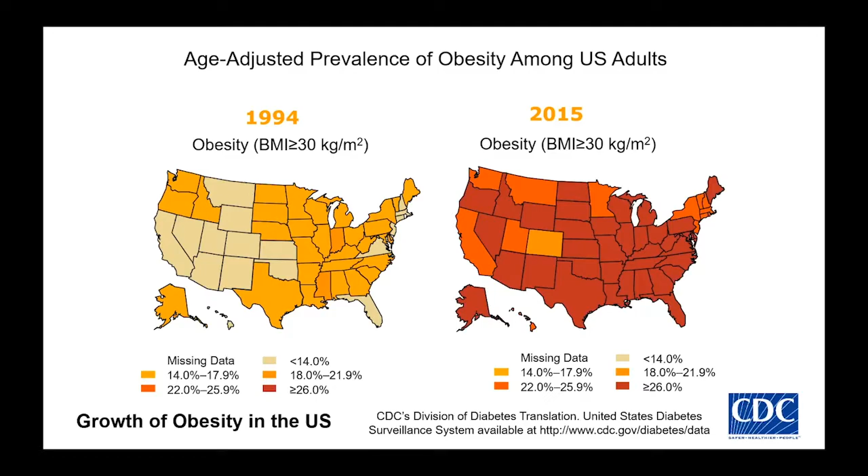So really, we think it's very important what we do as landscape architects, to create places for people to connect with nature and to exercise and to play. And that's why we think it's very important what we're going to be showing you today.

Quick history of Mission Valley. As you probably know, the San Diego River runs right through Mission Valley. It's 52 miles long, a 440 square mile watershed, a significant body of water. The Kumeyaay Native Americans inhabited the valley for over 10,000 years. We built the first Spanish mission in Mission Valley in 1769. And then in 1816, a significant change was the Mission Valley Dam and Flume, built to carry water into the valley. And then the water supported agriculture and dairy farms, all the way up until the 1960s.

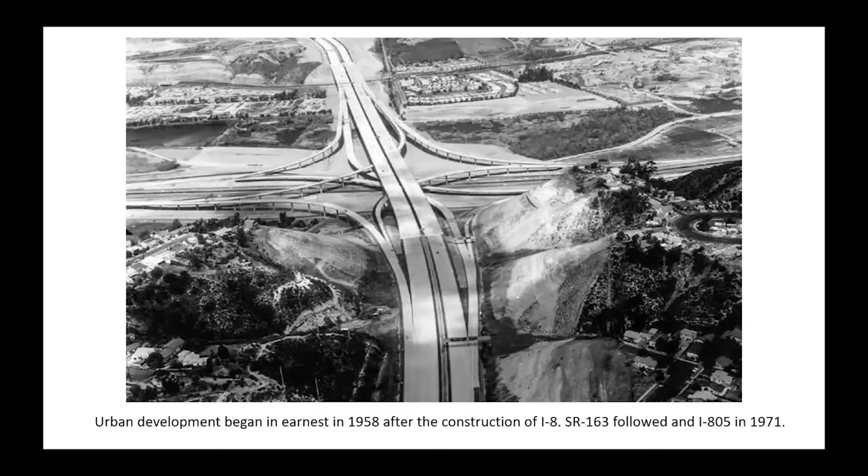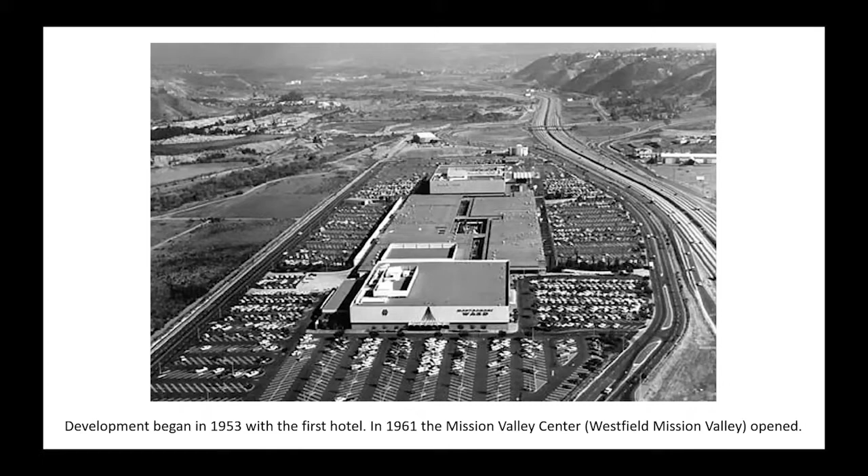And then in the late 50s, early 60s, we had the 163 and 805 built. We had the first hotel built in 1953, Mission Valley Center in 1961, and development continued throughout Mission Valley. Now, of course, that was offset by a number of flood events.

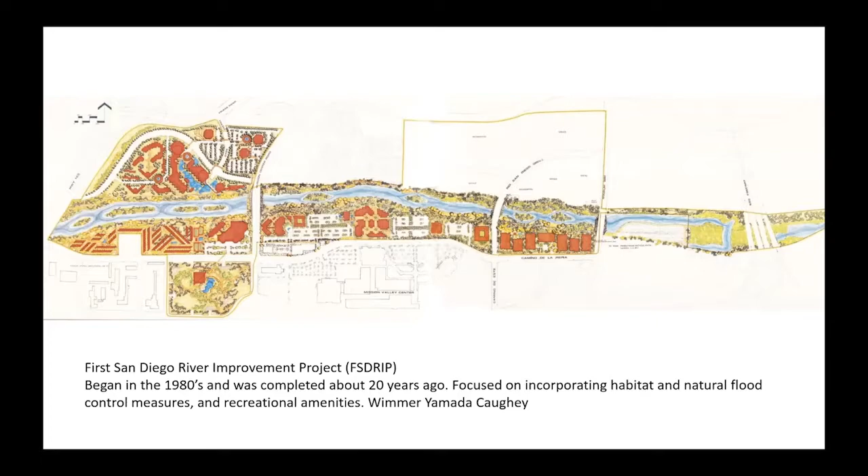And so the first San Diego River Improvement Project began in the early 80s and completed about 20 years ago. That focused on incorporating habitat and natural flood control measures and recreational amenities, which really has helped to create a much healthier river and to offset many of these flood events.

And then we have the River Park Master Plan, which actually envisions a linear park all the way along the San Diego River from the ocean all the way to the mountains. That is being implemented piece by piece, and our projects are part of that.

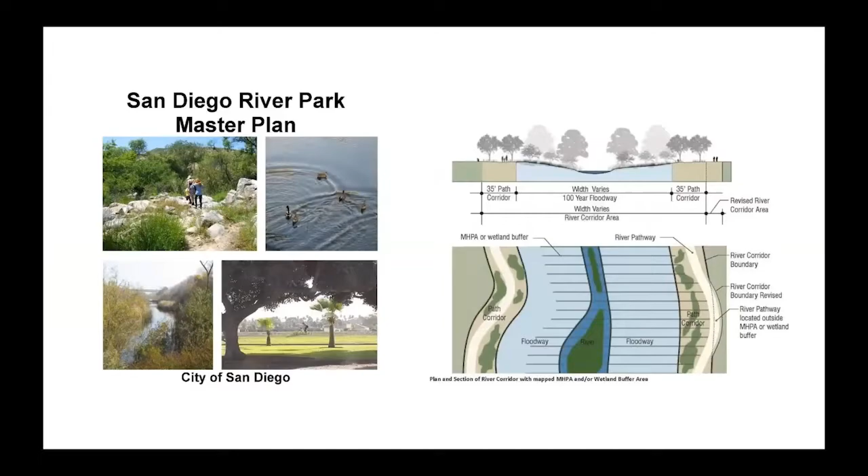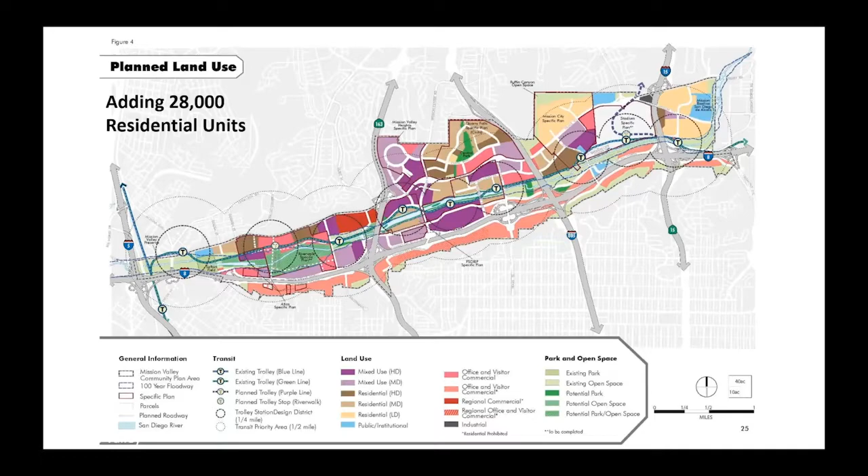Then the Mission Valley Community Plan was adopted very recently, September 2019, and that has envisioned adding 28,000 more residential units to Mission Valley. So significant changes along with a number of parks and open spaces. And our 5 projects represent about half of that added density. And we're going to give you a tour of each of them, starting with Mark, who's going to talk about Riverwalk.

Great, thank you, Glenn. I appreciate that. So yeah, Riverwalk is a transit-oriented development project that is proposed by Hines. It's currently in the planning entitlement process, and it's located along Friars Road, just west of Fashion Valley Mall. It's currently a 27-hole golf course, which is a lot of open space, but it's primarily great for those who golf and limits access to the site for those who don't. So what's great about this project is it will open up a lot of open space to the general public.

The project itself is proposing 4,300 residential units, primarily north of the river, 1 million square feet of Class A office space, primarily focused in the southeast corner of the site, a retail hub centered around a new transit center trolley station along the Green Line, and 97 acres of park space and open space that we'll focus on today.

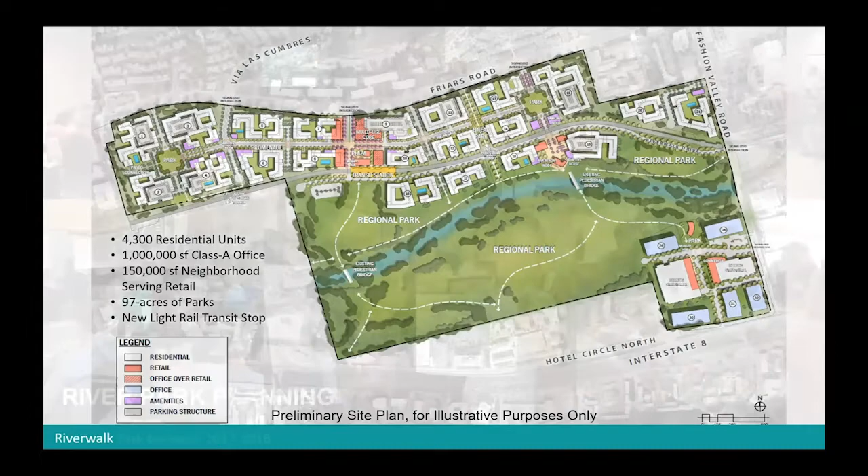Throughout the last 4 or 5 years of the planning process, Hines and the design team have made multiple public workshop presentations and multiple presentations to both Mission Valley Planning Group and Linda Vista Planning Group as well. As a result of the public outreach and some of our work with the community focusing on the park design, the consensus has been that the public is looking for about 30% of the park spaces to be used for active use and 70% used for passive.

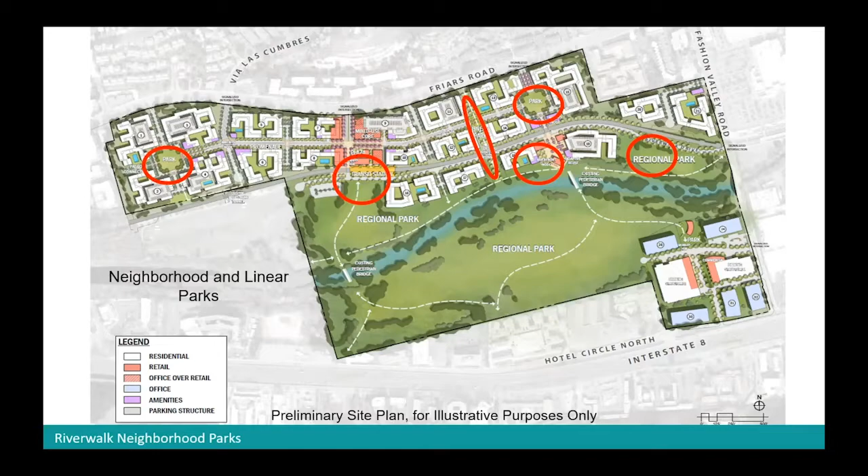The overall development includes a variety of different shapes and sizes of park space and open space, includes 2 mini parks and multiple pocket parks north of the existing tracks, a linear park that would connect Friars Road to the San Diego River corridor and the river park, public plaza space centered around the proposed transit center, and 2 neighborhood parks just north of the proposed river park.

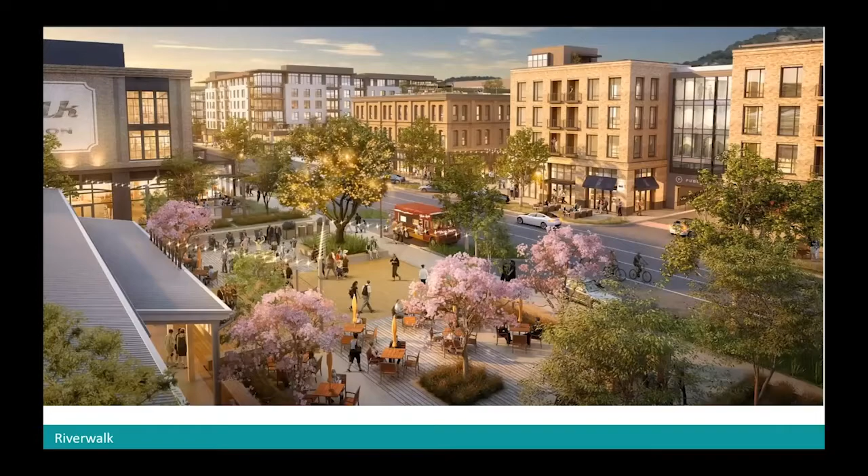This is the north side of the Trolley Station, a public civic plaza space that would provide uses such as outdoor markets, outdoor dining, food trucks, and civic gatherings. The next slide is of the south side of the Trolley Station, which you can see incorporates some retail and would help activate the space.

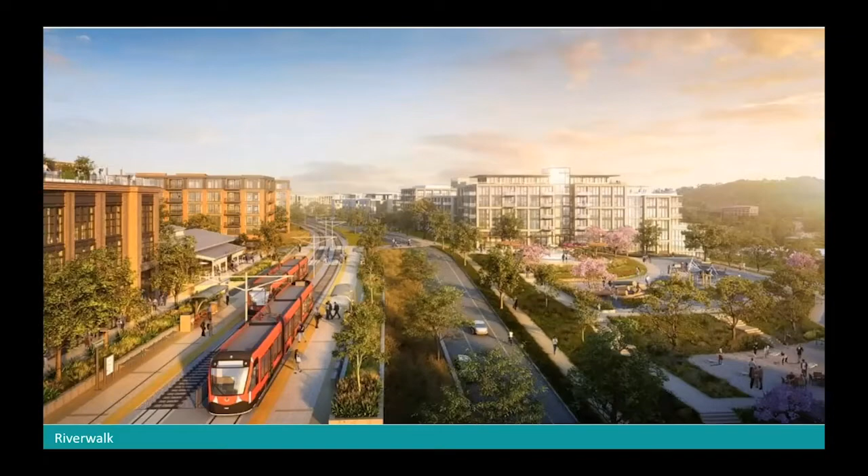This view shows the proposed Trolley Station on the left and a neighborhood park to the right. And with the topography of the site, the Trolley Station sits up such that it really gives great views south to this expanded open space and river park. Many of the streets will also help reinforce that connection to the river and open space, especially the north-south streets, as they are view corridors to that open space.

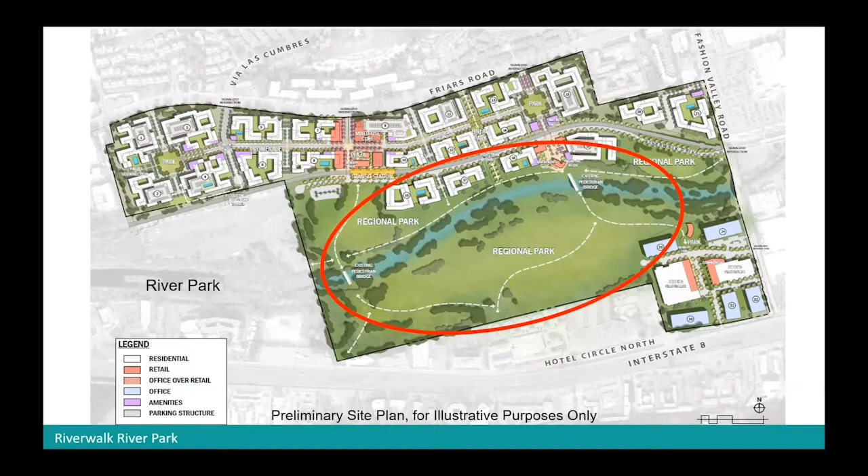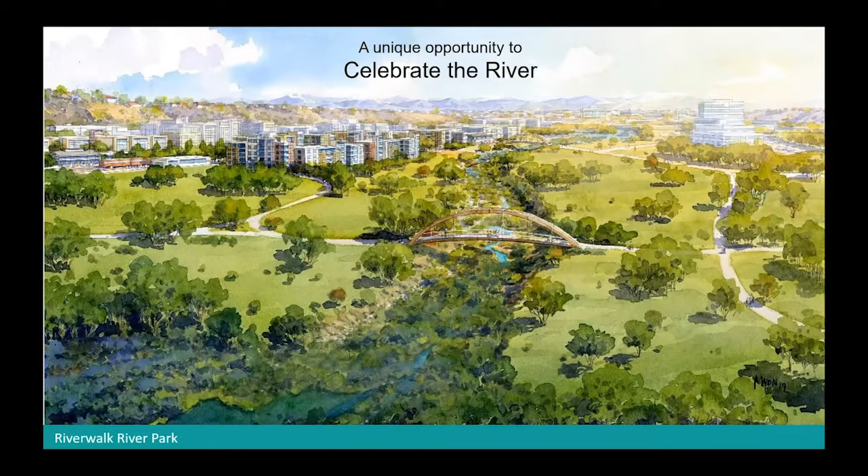So the regional park obviously is the focus of today's presentation. It's approximately 80 acres of park and habitat/open space, creation of a lot more habitat as well with this development. It will add about 0.75 miles of San Diego River Trail and habitat creation on both sides of the river, and miles of trails throughout. And so what we see here is an opportunity to connect with the river, celebrate the river, not just in the river park, but even throughout the entire development.

And what this does too is it also removes a lot of non-native turf grasses and reduces the fertilizer needed to maintain a golf course. So we're really improving the health and ecology of this section of the river.

Throughout, we'll be adding a number of observation areas and interpretive signage for educational opportunities, so that people can learn more about the San Diego River and the flora and fauna that exists throughout. As I mentioned, San Diego River Trail will connect through and add a missing link, a big missing link here, and we'll also connect to the portion through the Town and Country project that Rick will be presenting next.

Throughout the river park, we envision a number of amenities, such as connection to nature and water, interpretive signage, outdoor fitness, which ties into what Glenn was talking about earlier, as well as these open turf areas, which is a significant need for Mission Valley right now. There's a deficit, and these projects that we'll present will help fill in that need.

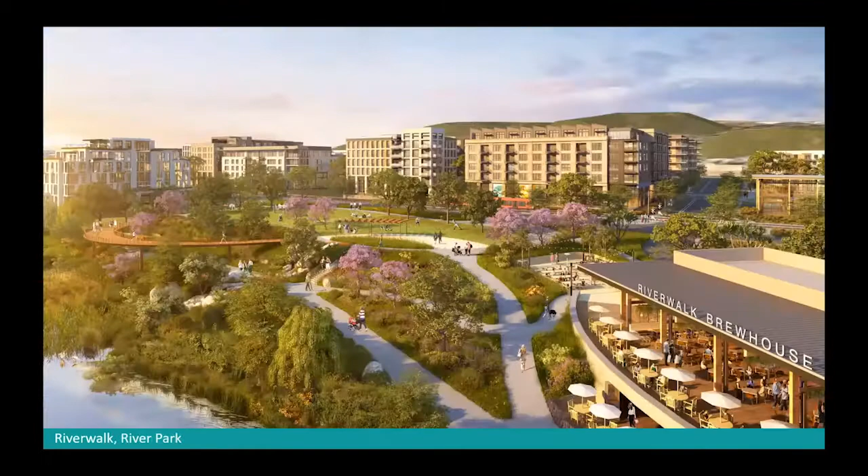One of the unique things about this project is Hines is proposing to take the existing clubhouse and redevelop it and repurpose it as a restaurant or brewery, as you see here. And adjacent to that would be one of the neighborhood parks where we hope to include an observation deck that would really help create that connection and view of the river, which is few and far between right now. Next slide, same thing.

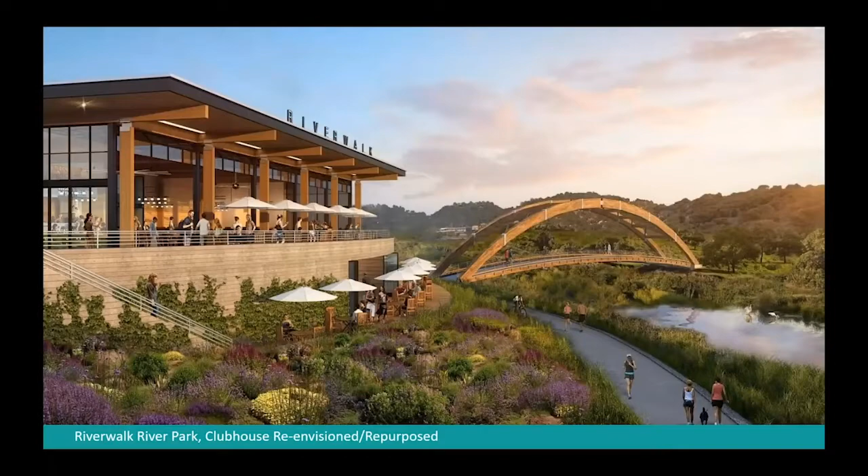One of the other unique things about this is utilizing the existing bridges. There's two of these very architecturally striking bridges that would be utilized for connection north and south.

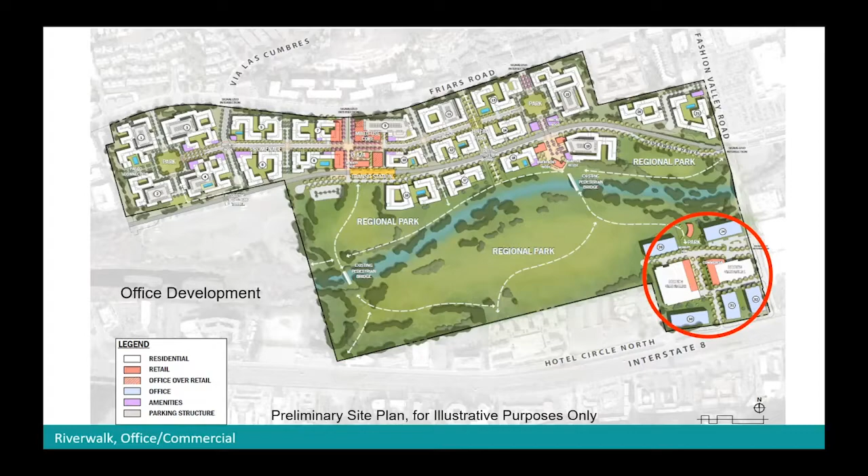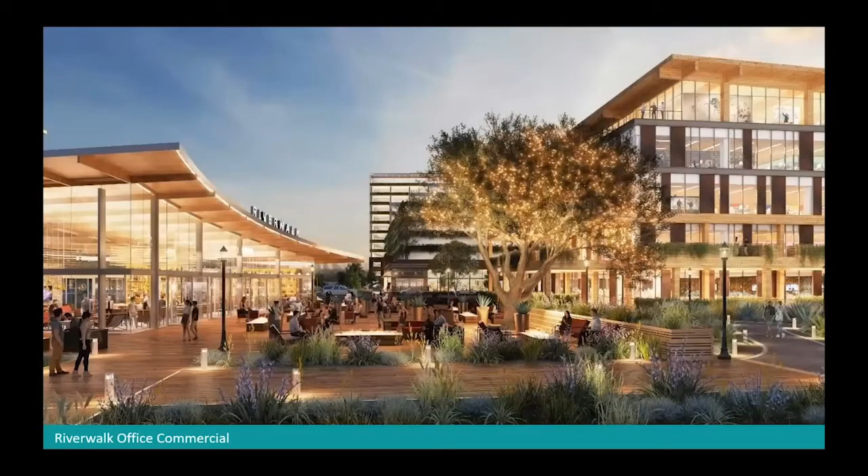Lastly, I want to quickly focus on the office development. It too, like the residential portion, is focused on creating a connection to the open space. And a couple renderings here highlight that. It opens up to the trails that you can see on the right, and we hope to create throughout the whole development a couple tributaries, as we call them, which are sort of faux connections that lead down to the San Diego River and River Corridor. With that, I'll turn it over to Rick, who will present Town and Country.

Great. Well, thank you, Mark. Just immediately east of the Riverwalk project is the Town and Country project. The Town and Country Resort has been a hallmark icon in the heart of Mission Valley for over 50 years. And just a couple of years ago, Lowe Enterprises, the developer of this project, began a complete top-down transformation of the hotel with new residential buildings, significant pedestrian improvements within the project, new resort pools and other amenities for guests.

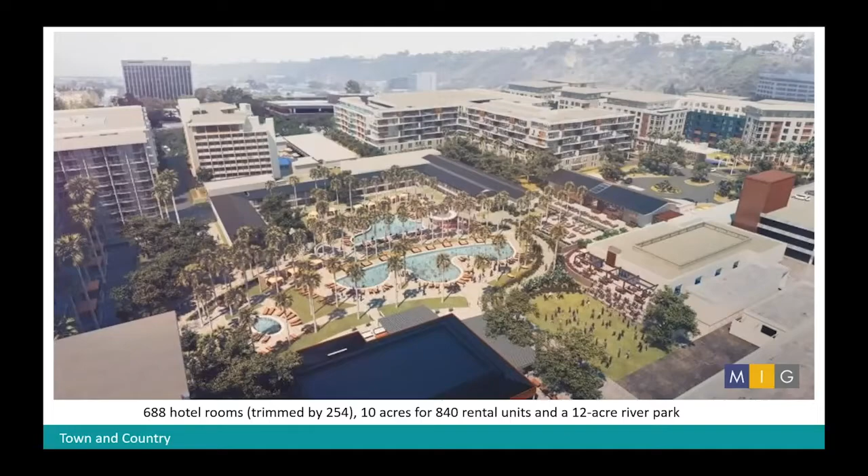So over the course of the design of the project, we worked closely with Lowe Enterprises and Todd Major, Rob Hutsel, the River Park Foundation and others to transform these parking lots into parks. This includes a number of trails, a new pedestrian connection across the San Diego River, and overall a very strong emphasis on ecological improvement of the whole 12-acre area.

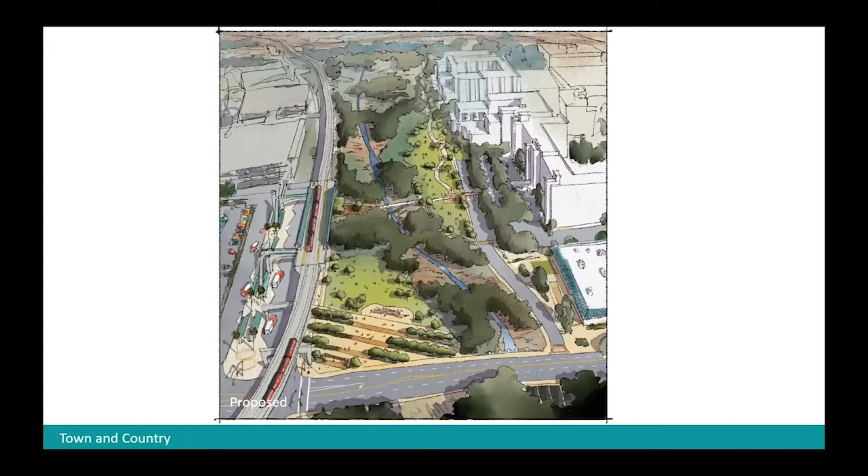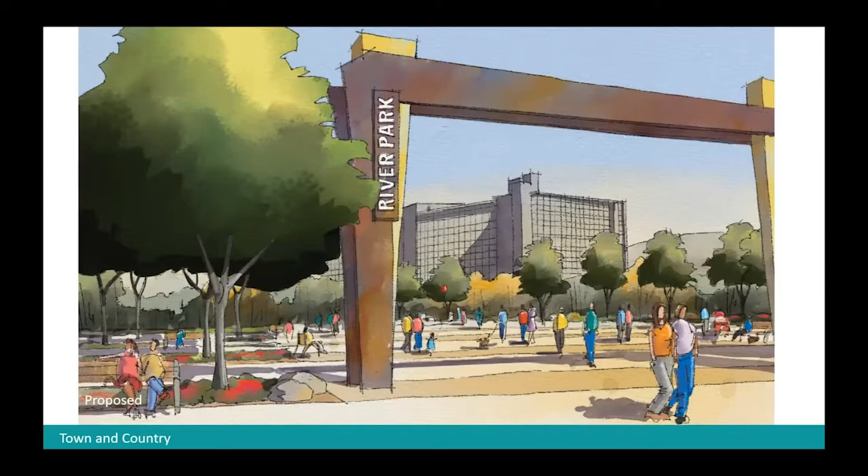As depicted in this next slide, the surface parking lots are being transformed into park space, including, again, a major component of the San Diego River Trail, which Glenn mentioned, which will eventually connect the ocean to the west to the upper elevations and the mountains to the east. So that's part of the River Park Master Plan, and will include significant gateway and interpretive elements that speak to the history of the river in this area.

And again, this is a project that is very much focused on the San Diego River and will provide a valuable asset, not just for hotel guests, but for residents of Mission Valley as part of that 28,000 unit growth. And as depicted here, a new pedestrian bridge across the San Diego River was a big part of the project. The previous bridge was not ADA compliant, and as Glenn mentioned, this project is under construction and in fact will be nearing completion in the next month or two. And I encourage you all to come down and visit the Town and Country River Park between Town and Country and Fashion Valley Mall.

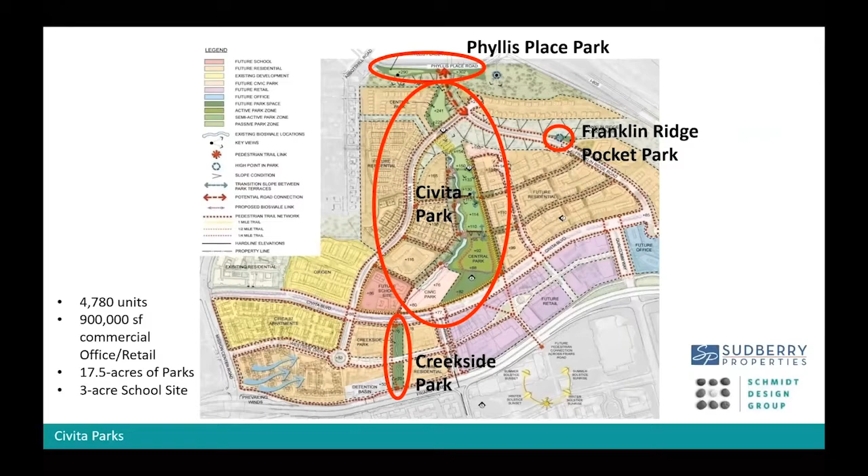Great, thank you, Rick. I'm going to be talking a little bit about Civita. Civita is located north of Friars and in between 163 and 805. As many of you recall, this was a sand and gravel mine for about 70 years and has transformed into an urban walkable village. There are a number of parks throughout this development, which eventually could have close to 4,800 units, 900,000 square feet of commercial office. But our park spaces, close to 18 acres of park spaces, are really going to be interesting spaces. We have a number of pocket parks and things around the development, but I want to talk about the main portion of the park, which we call Civita Park. It really runs down the center of the development.

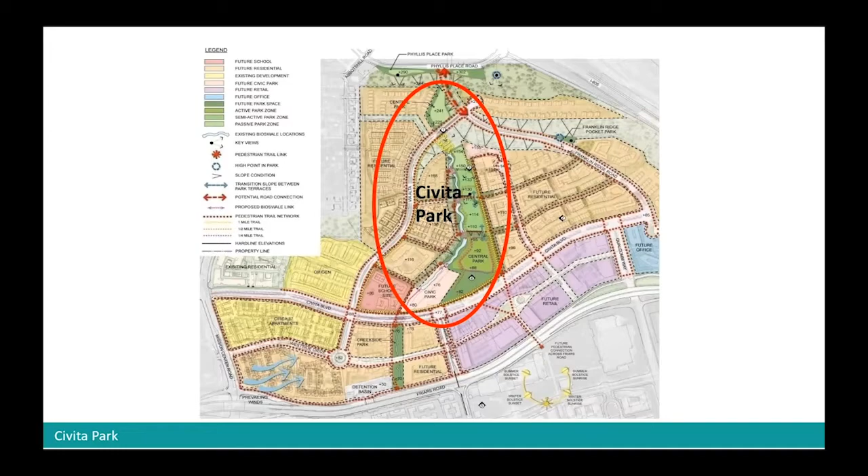But first I want to recognize the Grant family who have owned the land for centuries, and their partners, the Sudberry family and Sudberry Properties, who are developing it. They have just been very special clients and have really wanted to create a family legacy that they leave for all of San Diego. And so real proud of being able to work with them and the commitment they've made to quality. Of course, besides working with the families, we worked a lot with the community and had a number of community workshops, got a lot of feedback, but also were inspired by Mission Valley itself and the site.

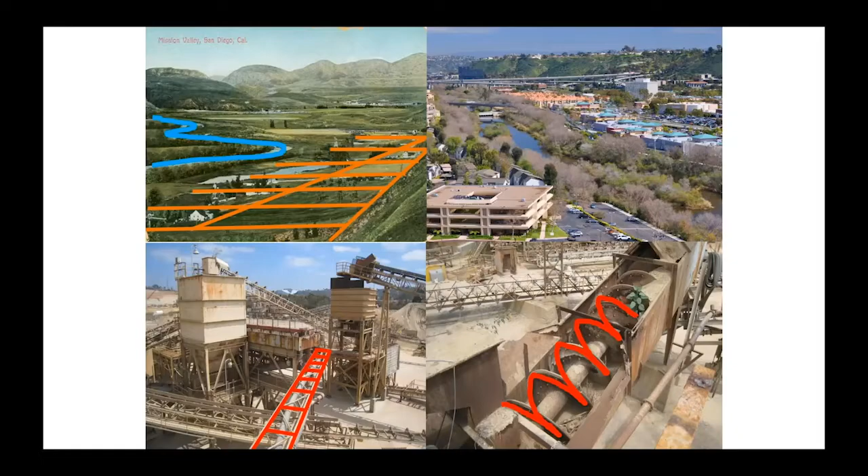So the upper two slides show the valley, even when it was agricultural, was a series of parcels and then this meandering river, same as the urban condition, and then some of the shapes within the sand and mining equipment inspired some of the forms in our park, which is that red promenade and the river that we put along the west side of the park. This is what we call Civita Creek, which captures all the water quality throughout.

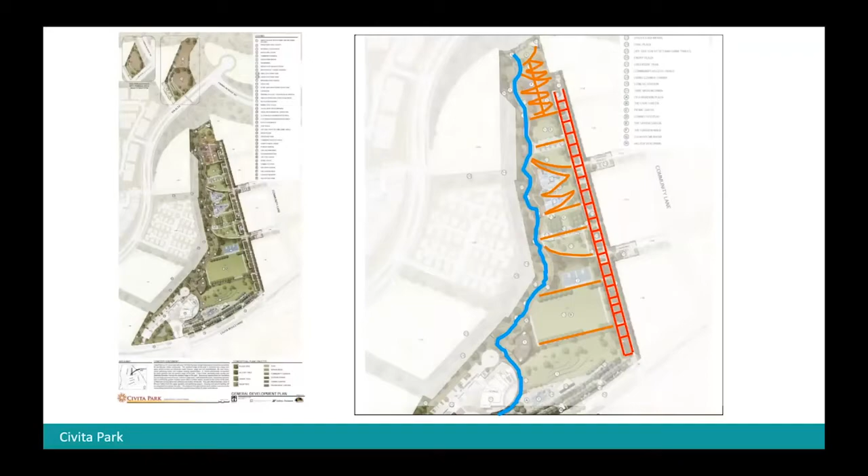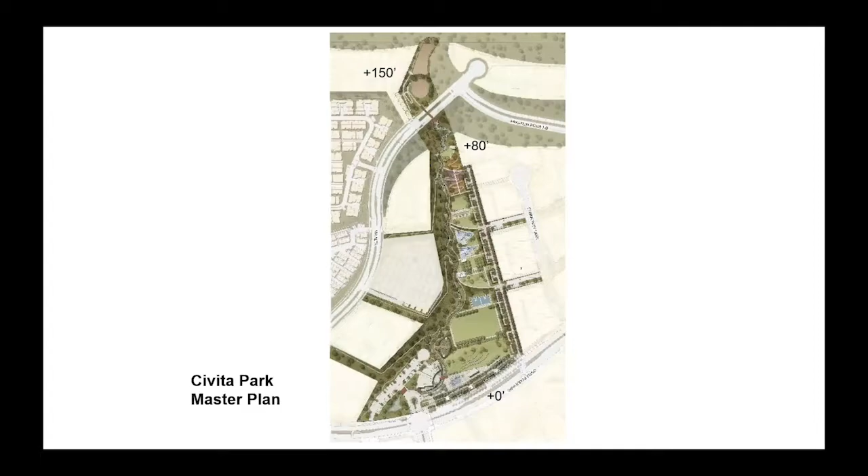So there are kind of two sections of the park. The right side of the park, which is the East Park, is more of this formal promenade along the urban edge. And then along the western edge, it's more natural. It's this meandering creek bed with these drop structures that actually flow during rain events. And that creates a really interesting, diverse character of the park. The master plan itself actually rises about 150 feet from Civita Boulevard to the top. Our first phase was completed in 2017, which includes a number of amenities.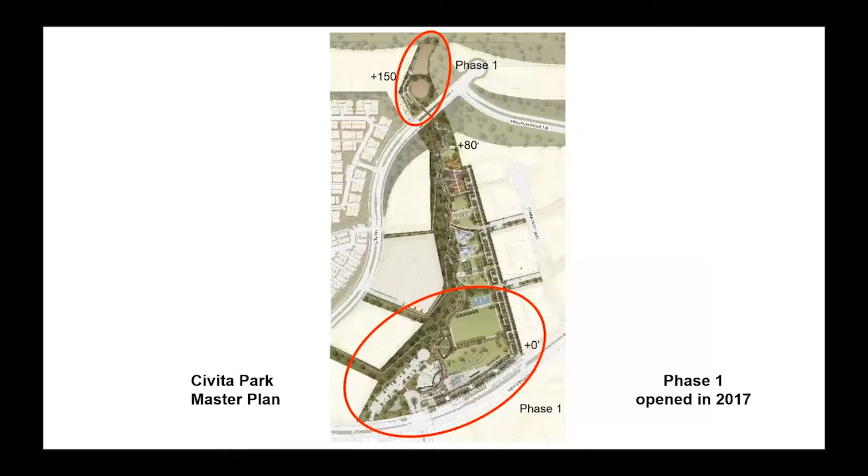We have a large celebration plaza, we call it, with open space and this interactive water and game tables. We also have a very large amphitheater structure there. And this plaza space is used for celebrations. We have farmers markets and all sorts of events, including this amphitheater. We call it Cloud Amphitheater, inspired by clouds in the valley, where they have a number of summer concerts each summer, which are free to the public.

We also had a number of different interesting details kind of weaved in throughout. We worked with James Nelson and T.J. Dixon on telling this interesting story about the history of the families here that were part of the development, the Grant family. And we have these series of bunnies, these bronze bunnies throughout, and they're almost kind of breadcrumbs.

They lead you up to what we call the Civita stone, which you have to search for with your kids when you get there. But even like these areas that we have, we call them the living rooms, which are these large vine structures. We have some of the bronze sculptures right there on the couch to sit with you. So really interesting things throughout.

We have a large area for multi-purpose activities, a large field. We have basketball. There's actually a community garden with a fully restored 1955 Porsche tractor that sits out front. And at night, that interactive water becomes a really beautiful display.

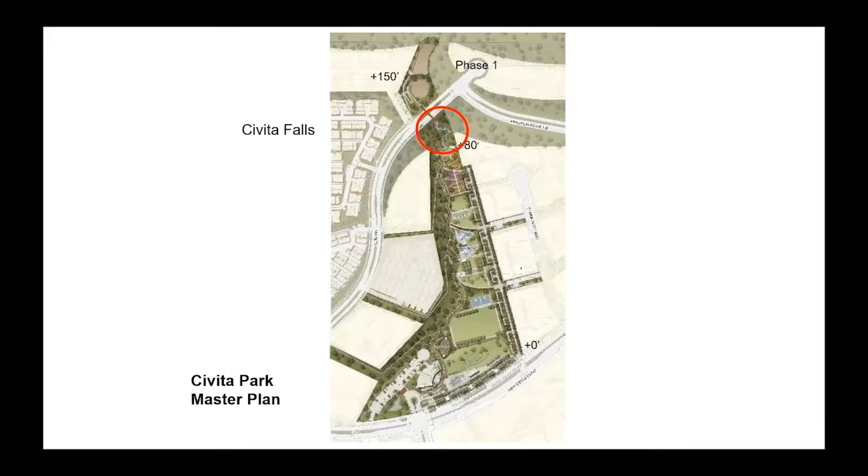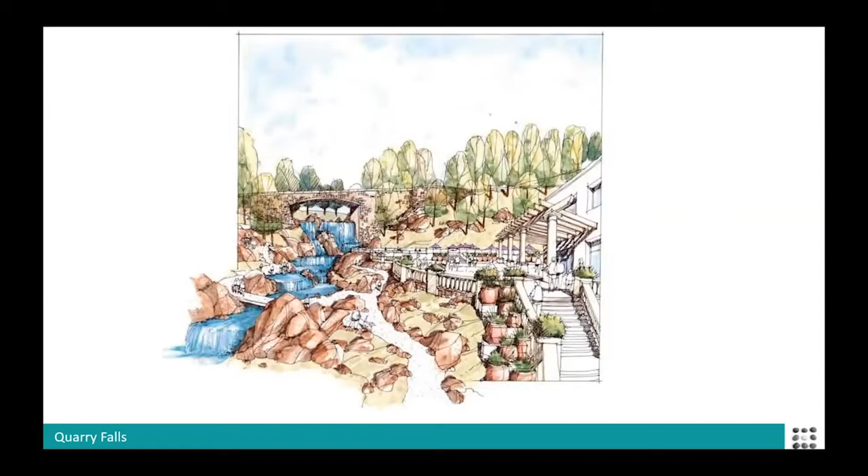One of the features that was originally designed in the specific plan, which actually Rick was involved in, was called Quarry Falls. And the idea was to have this kind of Las Vegas style waterfall. And what we did was we created the Civita Falls, but it is a natural waterfall that captures watershed from the surrounding communities. So during rain events, this waterfall flows, and it's quite fun to see it going off during storm events.

And as you see, there's a stairway that leads up to the upper level, which has a dog park, and you go through a really beautiful tunnel that has artwork, a really large mural created by Kevin Anderson. That's really fun to visit as well. And up above there, we have an off-leash dog park.

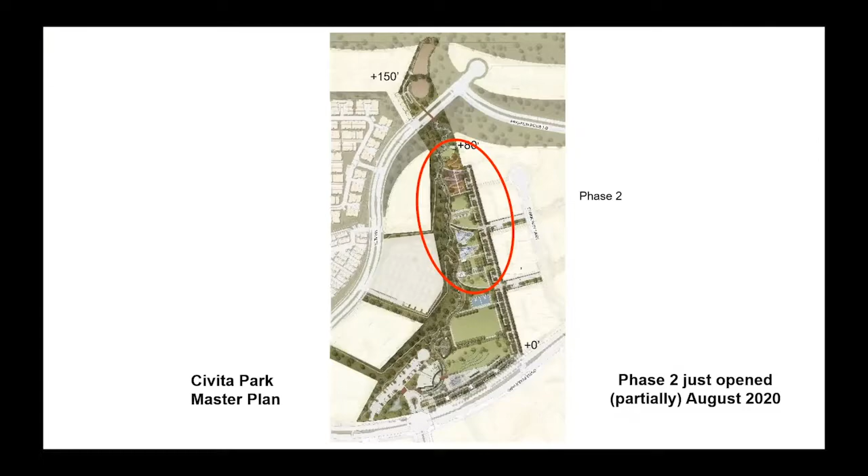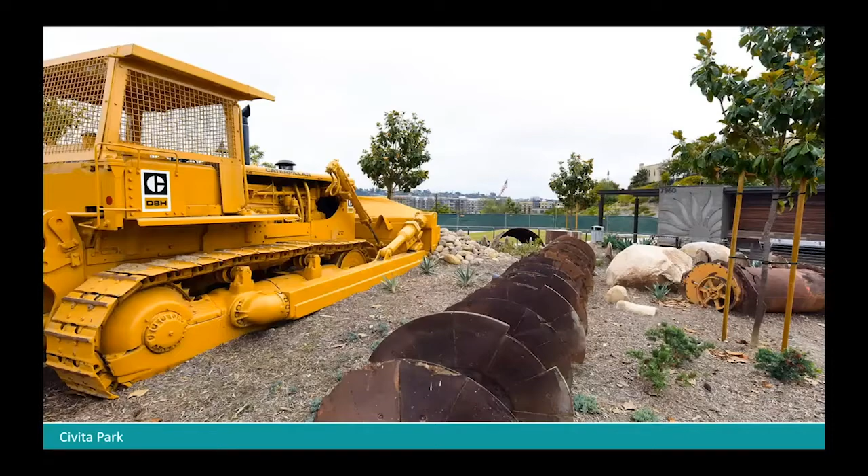Most recently, we just opened phase 2, which fills in different activities that were missing in phase 1. Phase 1 was opened in 2017. And here we have an overlook of phase 2. Starting down below, we actually have an exhibit that honors the mining history of the site with mining equipment that we tagged when they disassembled the mining operations, a large tractor.

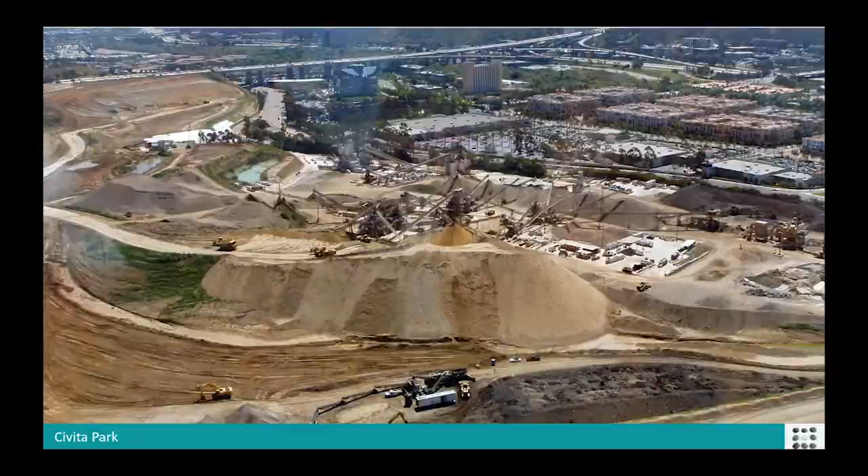And right above that is a number of children's play areas. This is a toddler area with a shade structure. We have some logs that were salvaged from redwood trees that were moved from Balboa Park. But this whole area of the playground especially is inspired by the forms of the mining operation, the way in which they terraced and sculpted the hillside. So the playground has over 100 feet of climbing walls as part of the terrace, paying homage to the mining operations that were there once before.

Right above that, we have a terrace with a game area with a bocce court, picnicking, and game tables. Above that, we have a series of gardens, which you can stroll through with the meandering pathways and stairway with all sorts of colors and textures and plant materials. We have 3 different themes: a succulent garden, a scent garden, and a wing garden to attract butterflies and birds. And there's interpretive panels, and many of the plants are labeled.

And then up at the very top, we have what we call Lookout Meadow, which is at the base of those stairs in the falls for events and activities. And one of the focal points there is this frame. One of the Grant cousins, Kent Grant, passed away during our planning stages, and he loved photography, and we thought it would be fitting to have an Instagram moment at the top of the park there for everyone to enjoy. So that's a quick tour of Civita Park, and Rick's gonna show you the River Discovery Center at Grant Park.

Well, thank you, Glenn. I'll take a few minutes to talk about the San Diego River Discovery Center at Grant Park. It is called Grant Park because it also came about through the generosity of the Grant family, as Glenn just showed some fantastic images of the Grant family in the previous slides. So this project began many years ago, in fact, during the development of the Quarry Falls / Civita specific plan. And it is a very unique project that is being led by Rob Hutsel at the San Diego River Park Foundation, and is transforming a key site in Mission Valley that was also previously a gravel mining operation.

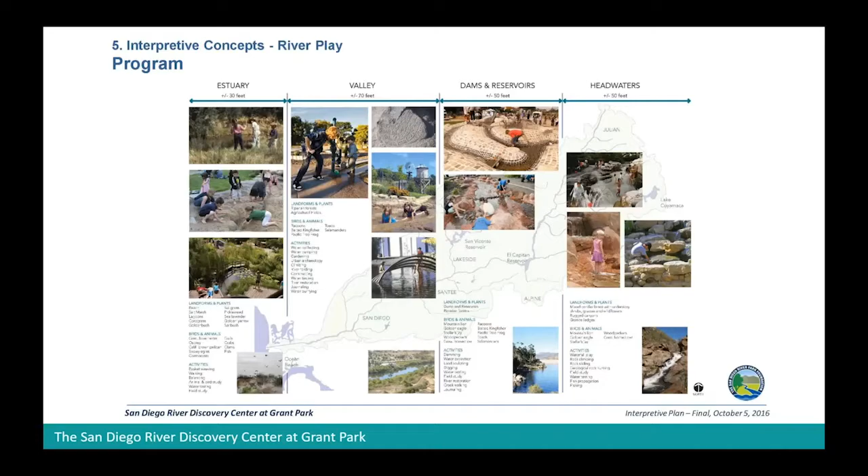So you can see each of these 4 sections were designed to simulate the headwaters, the dams and reservoirs, the valley, the Mission Valley area, and then finally the estuary at the Pacific Ocean. And so when this project is realized and fully constructed, and it is under construction now, as Glenn mentioned, this will be a fantastic outdoor play environment, but a learning environment for children, and it's tied directly into the building, as you can see here. So the river play itself is that crescent-shaped structure or area in the middle of the plan.

So as you see here in the plan, the headwaters are on the right, and then we go into an area called dams and reservoirs, the Mission Valley area, which will celebrate the agricultural history of the Mission Valley, and then finally the estuary on the far left, where kids will actually be able to dig in the sand and find fossils as part of our nature-based play area.

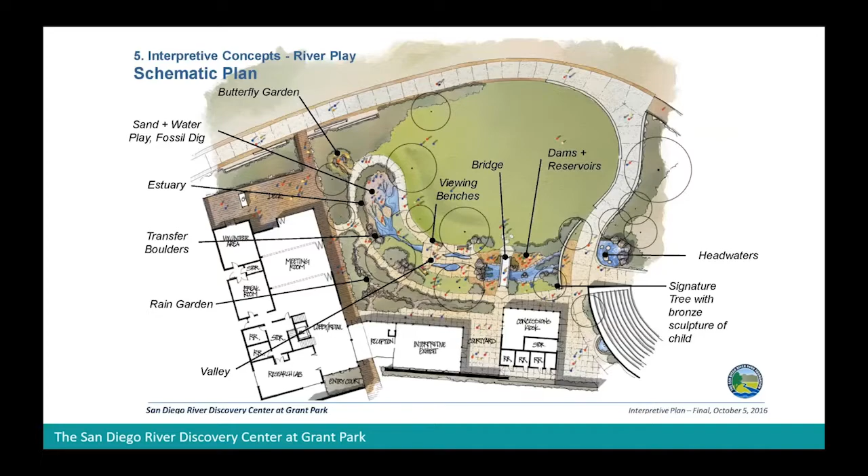The building includes a number of great facilities designed by R&T architects, an interpretive center, an outdoor cafe, a community gathering area, and then private meeting rooms, private offices for the River Park Foundation, and finally a river lab that's dedicated to exploring the health and welfare of the San Diego River. That will all be publicly viewable from inside the building.

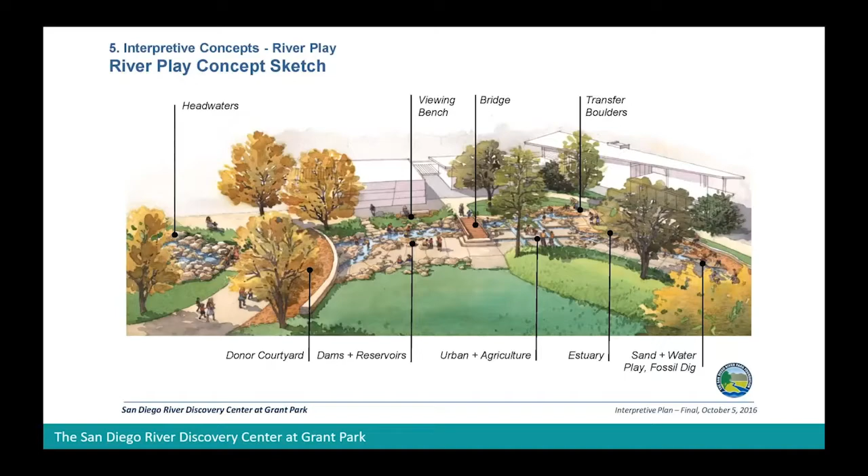This is a view perched basically above the San Diego River, looking south towards the river play. You can see the buildings in the background. So this is our illustration of what that river play area will look like. It'll be a fantastic amenity, as I mentioned, for kids of all ages, school buses, outdoor learning programs. We've also included in the design a touch pool, much like some of you may have seen at SeaWorld and other facilities in the area, where kids can actually stick their hand in the water and interact with different forms of water creatures.

Great, thank you, Rick. And finally, I'm going to give you a quick tour of SDSU, San Diego State Mission Valley. This is a development that was approved by the voters and actually broke ground just about a week or 2 ago, which we're very excited about. It's at what I typically call the Qualcomm Stadium site, the old Jack Murphy Stadium. And here they're going to be building a significant development and a significant park open to the public.

And by the way, all of the presentations, all of the things that we're talking about are open to the public. And that's what's really exciting about what is happening in Mission Valley, is the public facilities and benefit that these projects provide. The project that's under construction now will start with a 35,000 seat stadium for Aztec football and other events. And that is the blue area here. And on this map, the upper road is Friars Road. The freeway to the right there to the east is I-15. And then along the south side is the San Diego River.

Just south of the stadium there is a future campus. This is a research and innovation hub. It also includes a lot of joint use parking that will be used for the park. Just west of the stadium, you see there's two fields. Those are going to be ball fields except during game day, where they will be used for overflow parking.

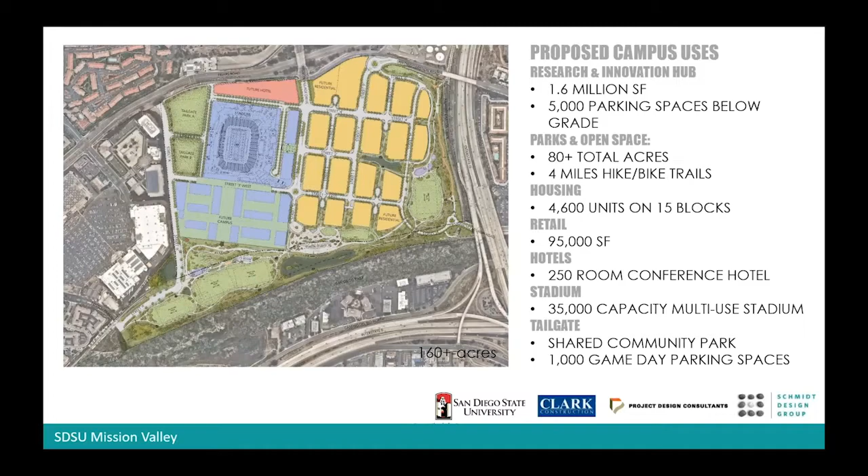North of the stadium is a future hotel, and then a large section to the east there that's the mustard color. There's about 4,600 residential units, apartments. And then featured along the whole south side and east side is a large river park available to the public.

A big part of the concept is the hydrology. And of course, the illustration on the left shows you our current condition, where during high storm events, the entire parking lot floods, as does the field. But once the project is complete, the main development will be raised to allow water to flow to the east and the south. And our park will be designed to accommodate that 100-year flood condition.

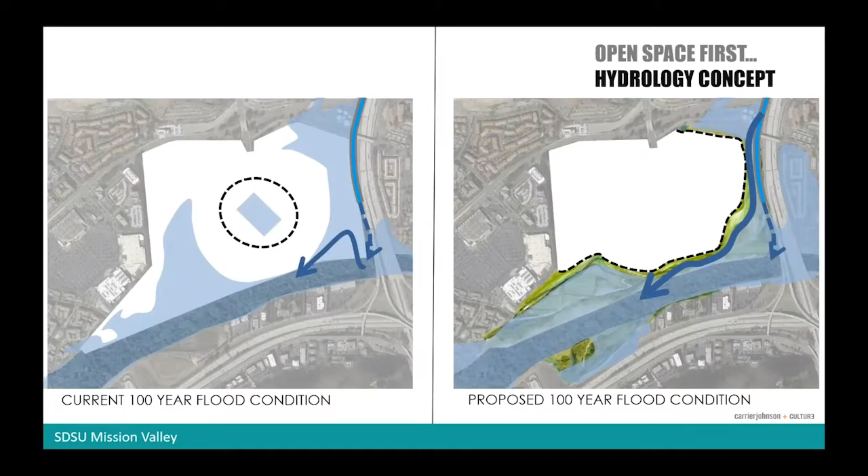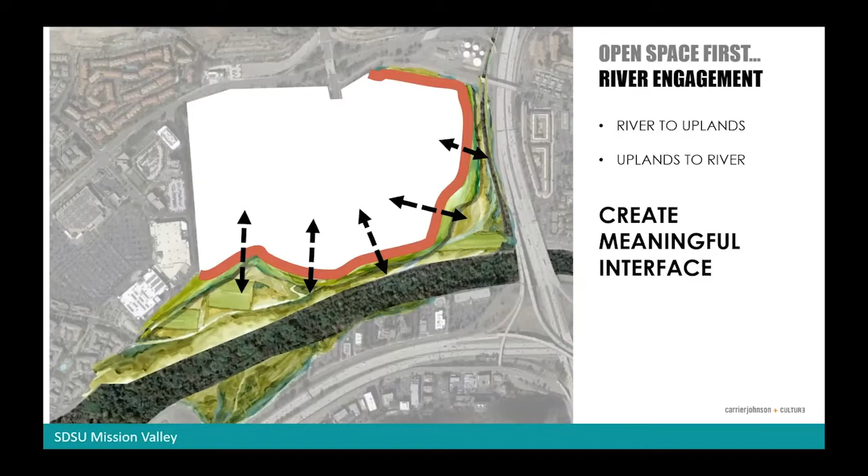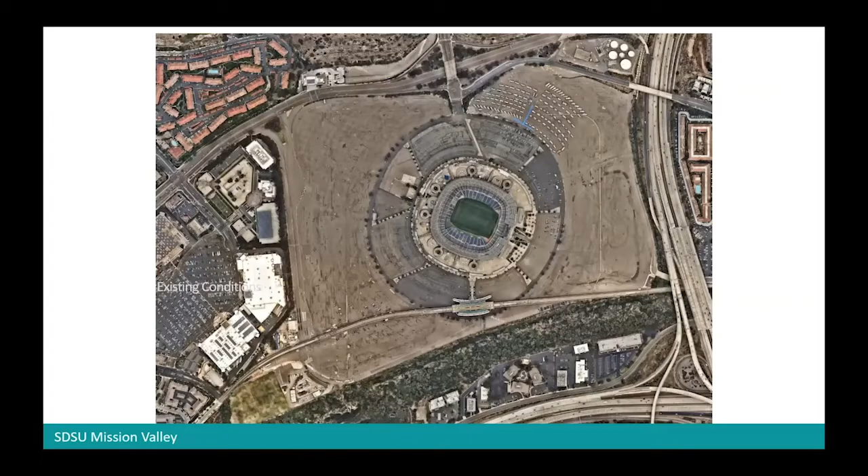And it also creates this great meaningful interface between open space, the park, and the development. We have view corridors and trail corridors that connect to the park throughout. And I like to call this a green sponge. It's really taking what is now the largest open parking lot west of the Mississippi and turning it into a much more permeable and much more rich environment that the public can enjoy.

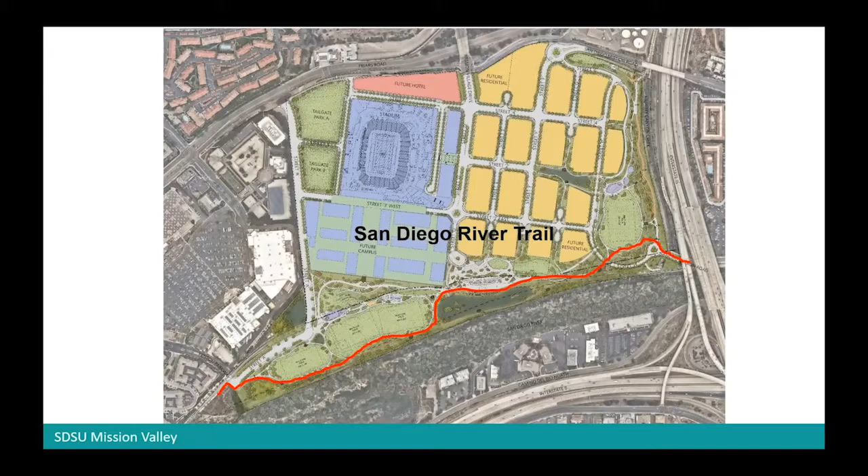We spent a lot of time working with the public. We had a number of community workshops. We have a River Park Advisory Committee that we are continuing to work with. Even though the project has broken ground, we're still working through the planning and design of the park and facility. We do have another connection to the San Diego River Trail. We also have about 8 miles of pathways and a large loop trail around the development.

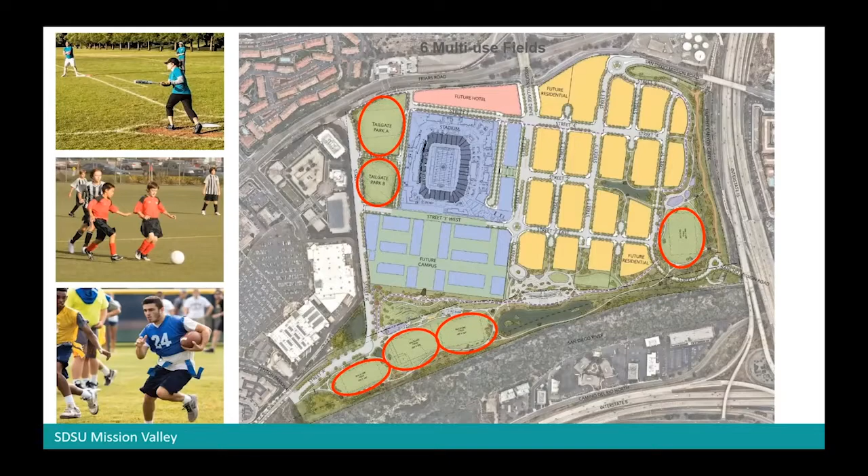We're planning 6 fields. I mentioned the 2 tailgate parks. We also have 4 fields. These are multi-purpose open space fields for all sorts of different activities and sports. But a big part of it, like Riverwalk and like many of our other projects we're talking about, is connecting with the San Diego River. It's really a special facility for San Diego. We want people to be aware of it and to connect with it.

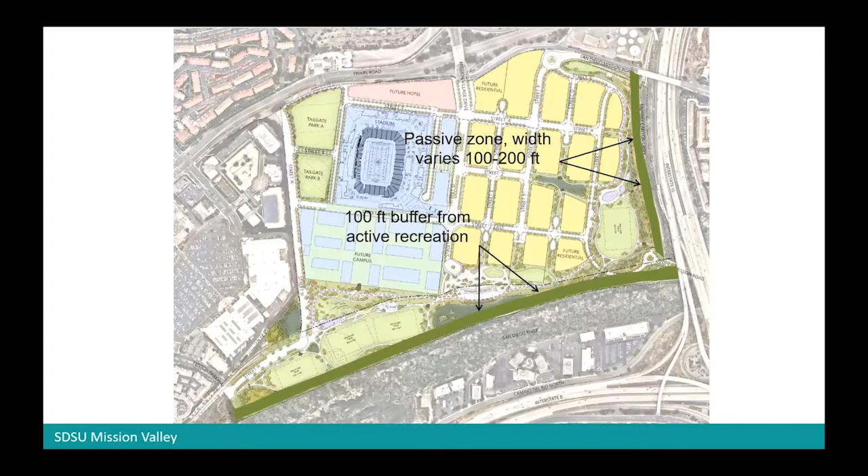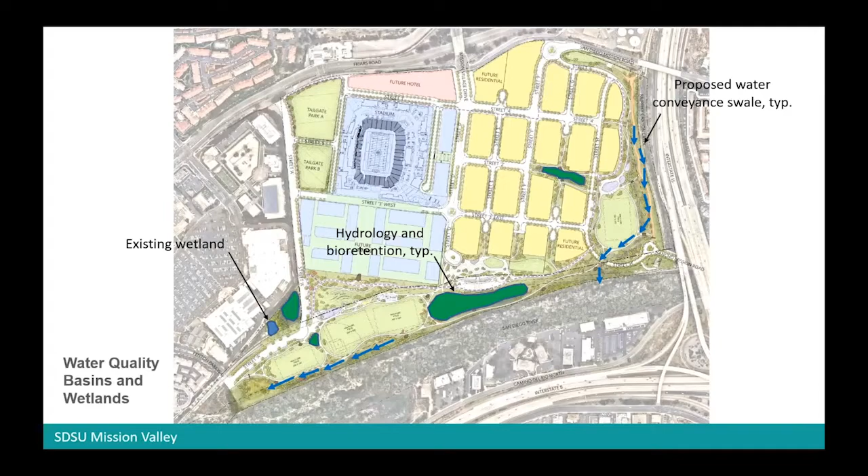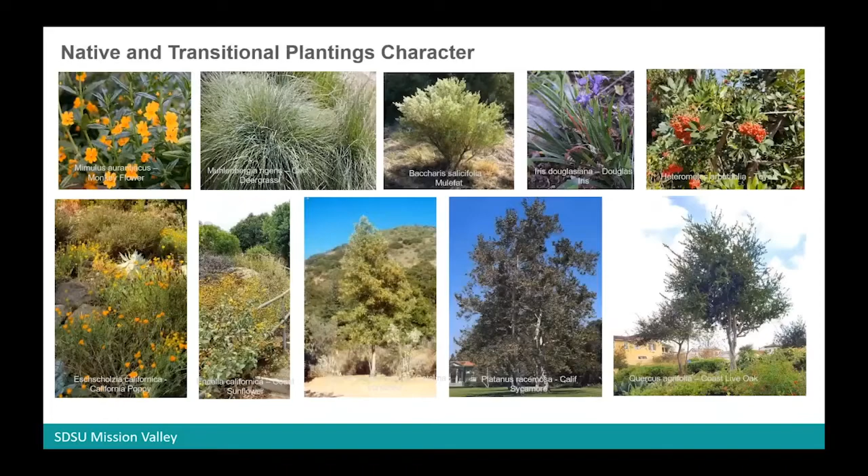But as Rick had mentioned, because of environmental constraints, we can't just invite people into the river. We have a passive zone, a buffer along the south and the east from that more sensitive habitat. So what we're doing is we're creating improvements within the development that have a river-like character to them. So we have swales and basins. This is kind of a character depiction of what those will look like. This idea that you are aware that you're near a river body. We also will be incorporating a lot of native plant material throughout the park.

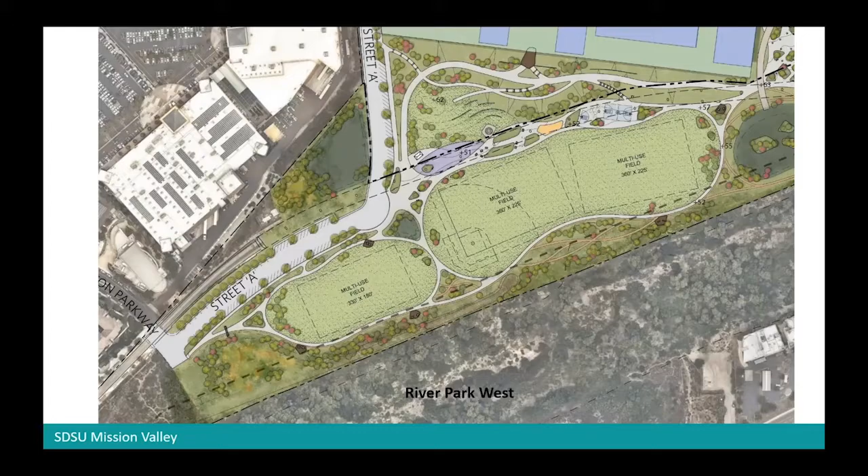Kind of zooming in here on the west portion of the park, just to the left side of the screen here is the Mission Valley Library and Fenton Parkway. That actually will become a bridge across the river, Fenton Parkway, eventually. And you can see that we have 3 large flexible open fields, but also what I like to call the ribbon of shade. So we have this elevated trolley track that runs through the entire length of the development, and it's about 50 foot wide, about 20-25 feet above the park.

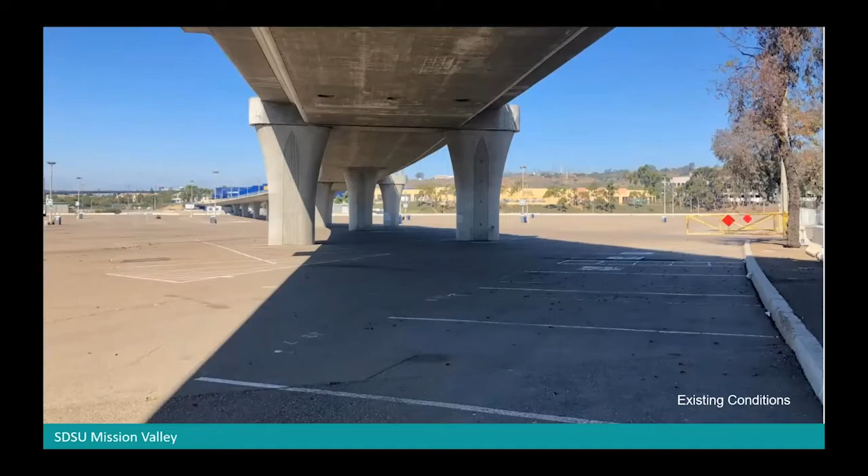When we're designing our parks, we oftentimes are trying to figure out how to get more shade. Trees take a while to mature, and large shade structures are expensive. So we have this built-in ribbon of shade. So we're aligning many of the activities underneath that shade. We have this play and picnic zone in particular, where we have all sorts of activities: children's play, open game area, picnicking, fitness area, basketball, and so forth. Those will be all underneath this ribbon of shade.

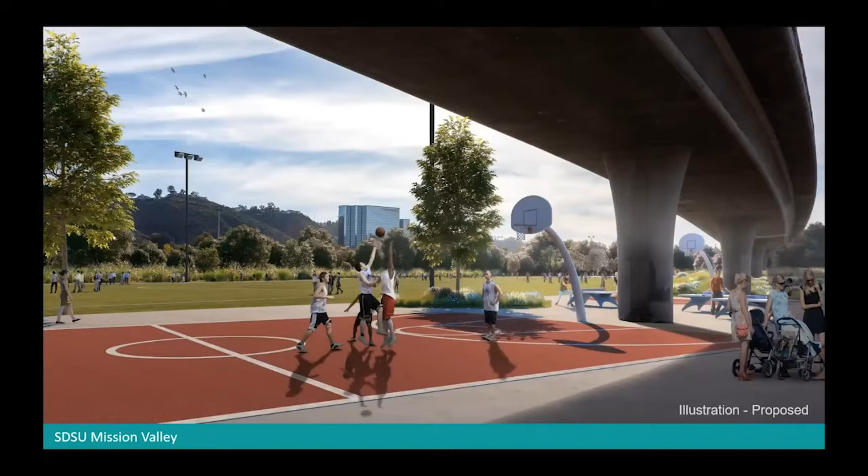And we have a few artist renderings here. This is taken from this vantage point in existing conditions. And this is what we anticipate that will look like when we incorporate our activities underneath that ribbon of shade. Then you look at the central part of the park.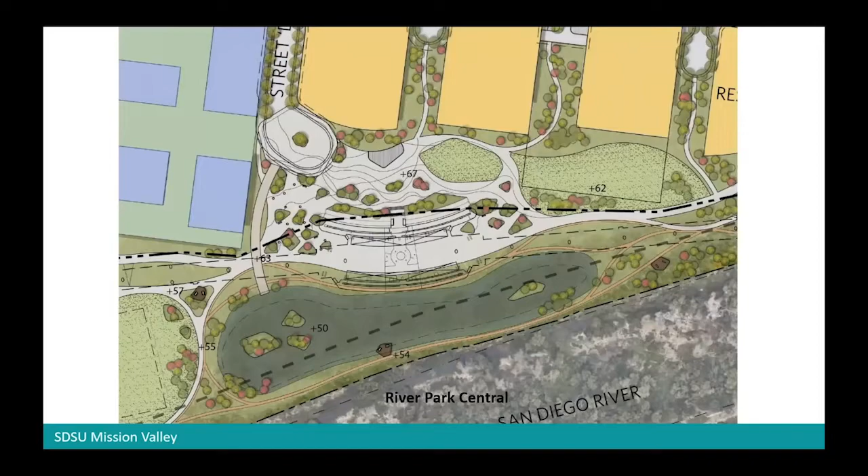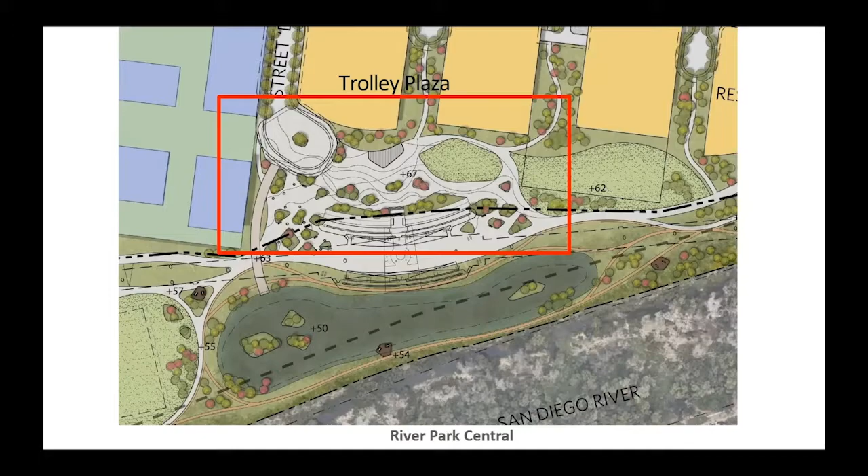It's where the current trolley station is. That will remain. Adjacent to that is a future recreation center. This will be built by the city of San Diego in the future. But in front of the trolley station, we're going to have a large trolley plaza. This will have a large area for bus drop-off and transit connection, but also a big open plaza space for flexible activities. These are some precedent types of character images of what that could look like.

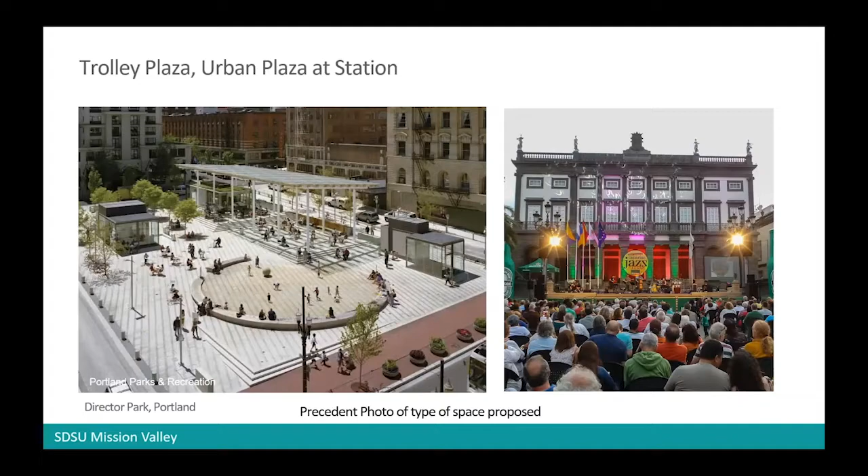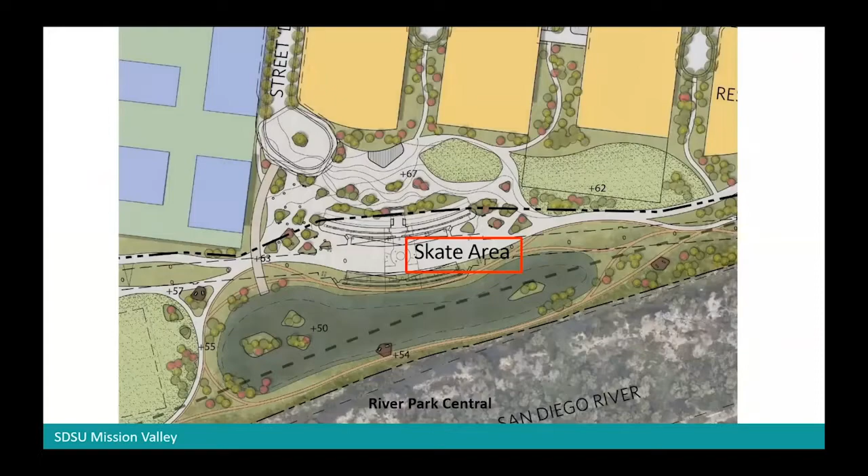And this is that station itself. Now the station also has a lot of shade behind it, and it's kind of underneath and behind the main activities. And so what we are proposing is to activate that, inspired by the Underpass Park in Toronto, have a little skate area underneath the portion of the station that's kind of back of house to get more activity there.

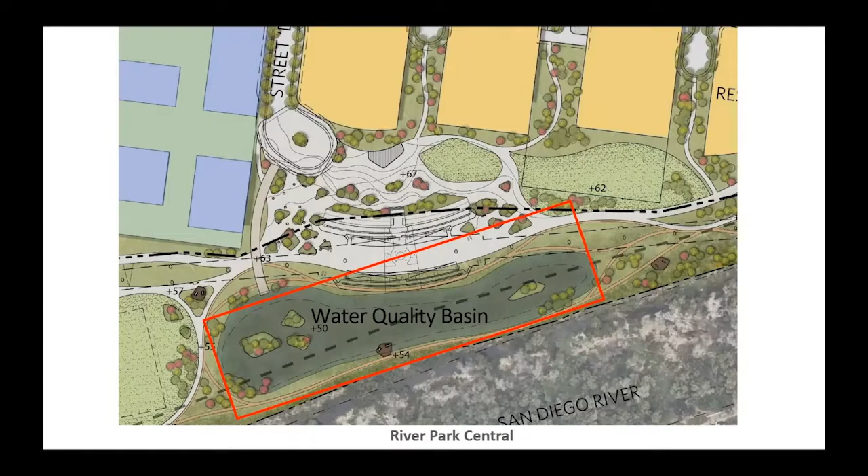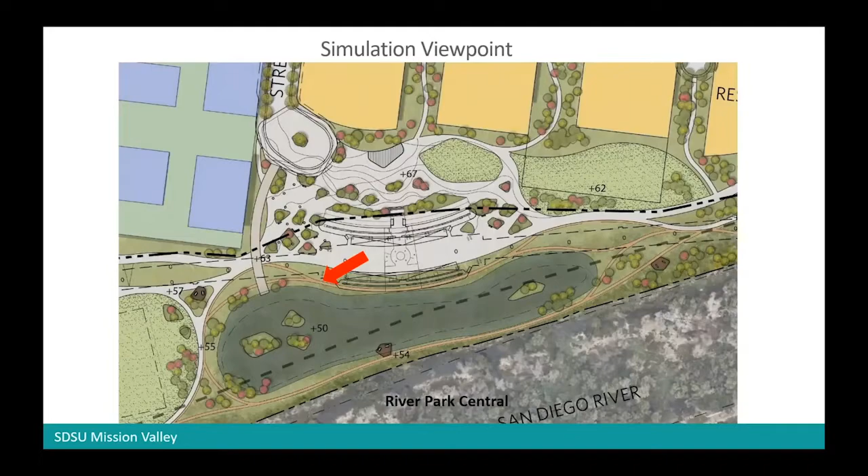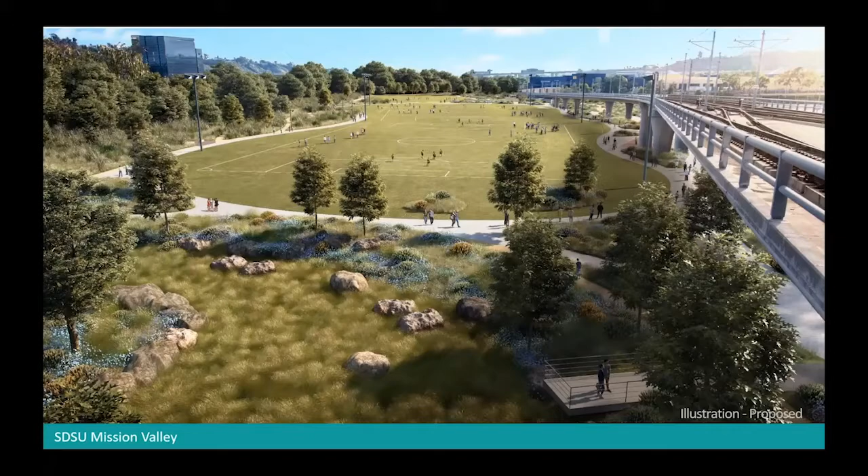South of this trolley station, we have a large water quality basin. This captures water from throughout the development and purifies it, and again, makes that kind of wetland character and river-like character that is a big part of what we are trying to accomplish with the park image and the park character. This is another artist rendering from above on the station of existing conditions, and then what that will look like with the large basin in the foreground and the overlook, the fields, the buffers to the left there, the native area, and then that ribbon of activity underneath the trolley.

We're also incorporating a lot of overlooks and environmental education. This is San Diego State University. They want this to be a place where students and faculty can go for research as well. And we have lots of opportunity for interpretive education, flora and fauna, and the cultural history of the site.

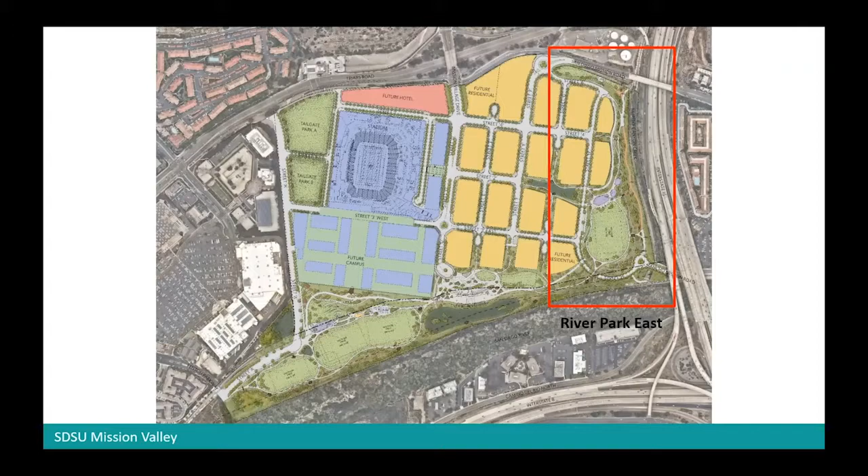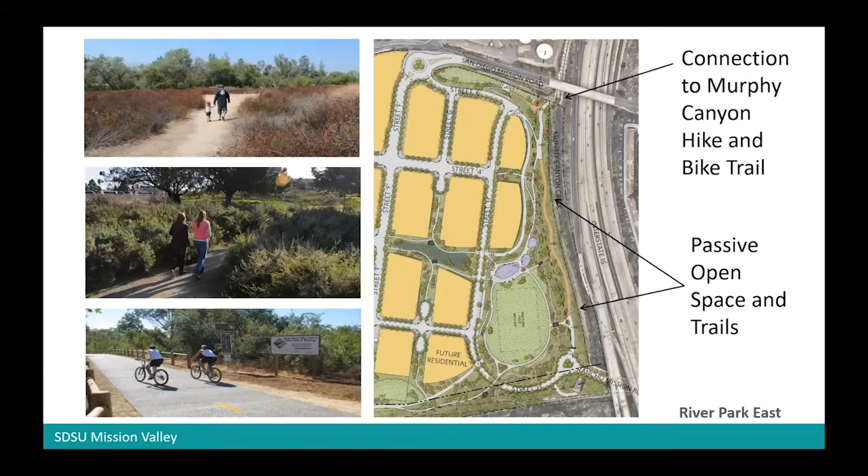And then the last section is River Park East, we call it, which parallels I-15, but more importantly, the Murphy Canyon Creek along that edge there. And on the north side of that, we have an off-leash dog park that is planned. And then a big portion of this section, the linear portion of the park here, will be passive open space and trails, more primitive trails and bike trails. And we also connect to the Murphy Canyon Hike and Bike Trail to the north. And this is also incorporating that river-like character with a creek bed there.

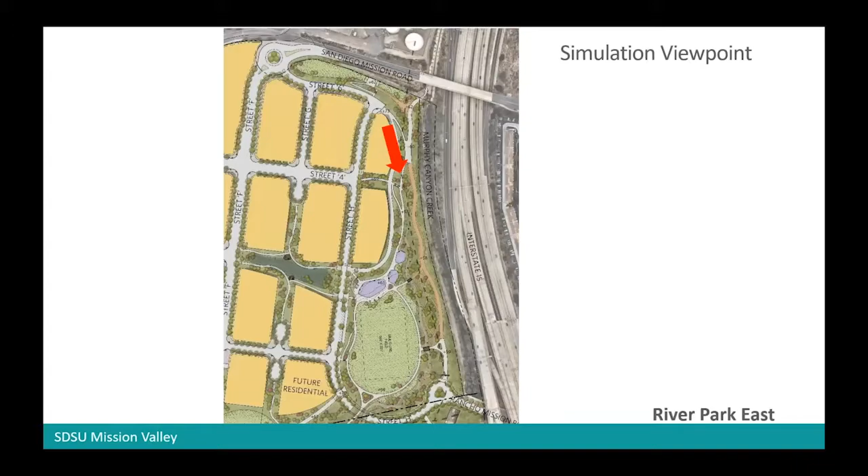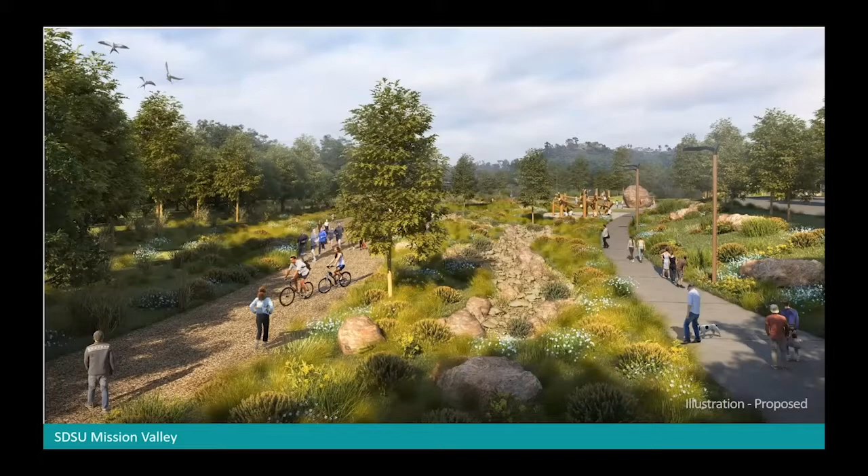This is another simulation looking at the existing conditions. This is great because we've got great material here for the before. There's nothing but asphalt, and we're going to turn this into this beautiful passive park with trails, the creek bed, and then you can see in the background there the children's play, and this children's play will be more nature play oriented.

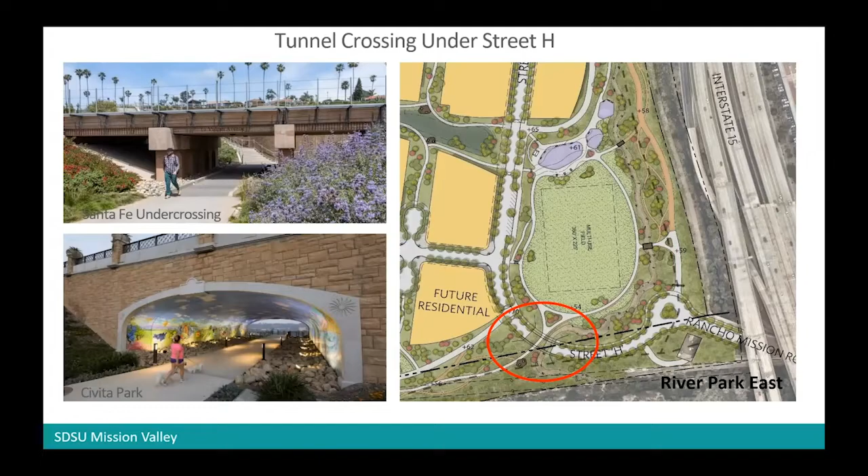And then finally, the connection between that East Park and the rest of the River Park is an underpass. This is a before again, and then afterward. And we have traffic coming from Rancho Mission Road that will be able to pass over this pedestrian underpass so that no one has to interact with the cars as they enter the site.

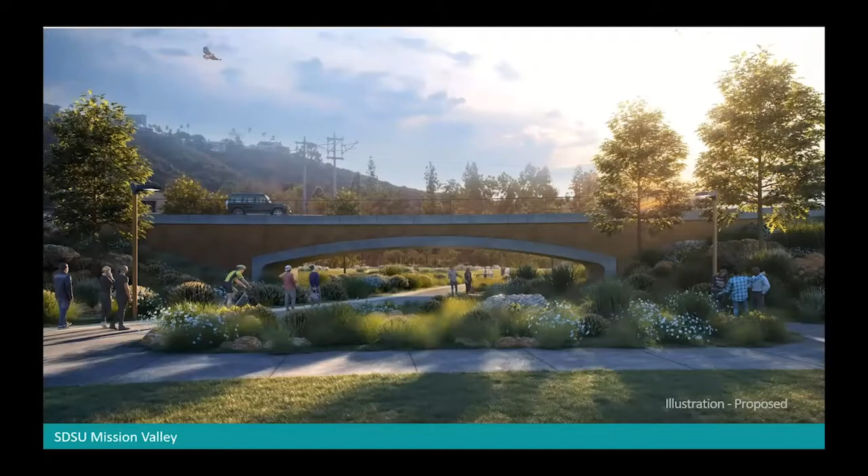So that's an overview of SDSU Mission Valley, which concludes our tour of our 5 sites throughout Mission Valley. And we mention that there's a lot of development that will occur, but we want to emphasize that this is well over 200 acres of open space and parkland that will be available to the public. We've got over 20 miles of trails, including almost a 2 mile extension of the San Diego River Trail.

We also, in closing, want to give special recognition and thank the owners, the folks that are responsible for these projects, the Sudberry family and Sudberry Properties, the Grant family, of course, we've mentioned many times, Rob Hutsel from San Diego River Park Foundation, Todd Major from Lowe Enterprises, and then President Adela De La Torre and all of San Diego State University for their work on a beautiful facility that they're creating.